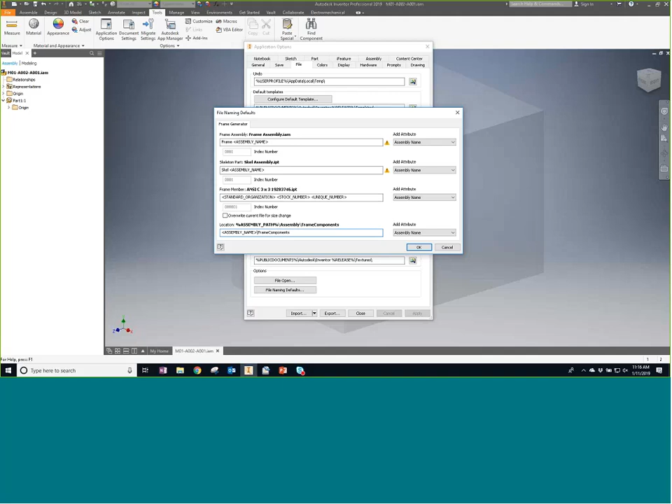Fair enough. So now that I've done all of that and put that in place, I'm going to throw some frame on real quick just so we can see this. The idea is that we're able to control all of that naming now.

And this isn't something that we have to—before, you're kind of at the mercy of the defaults that it's going to give it, and then maybe you'd go in and rename some things later or whatever else. But the idea would, you know, it was definitely a secondary operation.

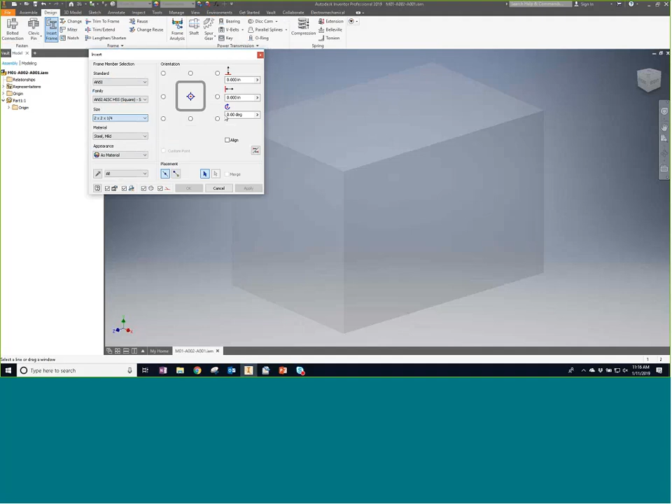So now we can continue. I can just continue on here, and I'll just do a real quick frame up here. Just grab some stuff—you, and you. That's good for now. We'll just say that because I want to show something else in a moment. But I'll say, okay, that's all good.

And I'm going to apply that, and it comes up with my names. So as it comes up with the names, you notice it's called frame, and then whatever my assembly name is, which that's my assembly name, M01, A002, A001, that's my assembly name.

So it says, okay, naming the frame that, naming the skeleton that, sounds good to me. And then it knows my frame name, it knows my location, which is now frame components, because that's where I told it to go, knows my skeleton name, I'll say, yep, that all sounds good to me.

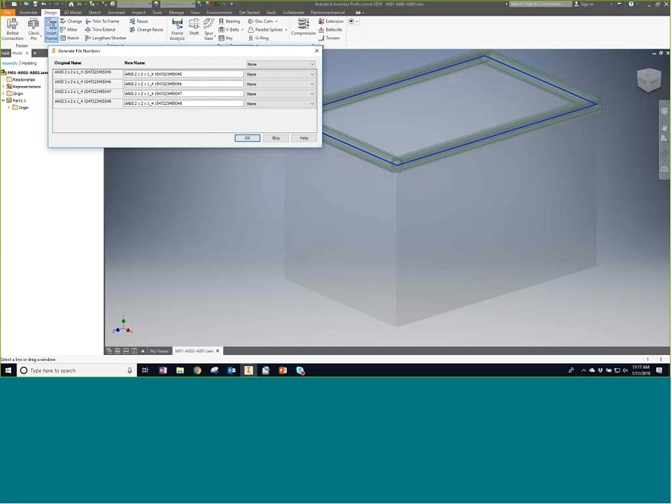And then each of these are being named. You'll notice they'll have a unique number as it goes through. So it's looking at it, it's hashing it, pulling a unique number for each one, and it's calling the information out. I say, okay, sounds good, sounds good, sounds good.

So now I've got the unique numbers, the unique names, all of that placed in there. It's a great way of accessing this to make sure that these don't overwrite each other, to make sure that we're not fighting for different names within there. So I think it's a great addition—a simple one, but a really cool way that they've added to that.

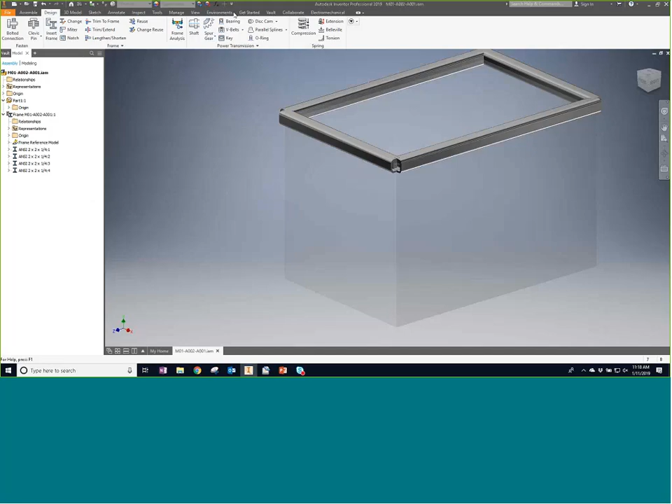I'm going to just jump back. A couple other quick things with Frame Generator, which is probably one of the bigger areas, better tools that we have within here. One thing they did is they added multiple select for a couple of different things. It works with miter, it works with notch, where we can now multiple select items.

I think we're going to see this—and this is my total made-up prediction—but my guess is we're going to see this multiple select happen more and more with Frame Generator. It was very much a frustration for me when I would go to work with something and I had to select it piece by piece. Oh yeah, that one's going to go here, great, that one's going to go here, and we'd kind of have to work through that a little bit.

Now we have the ability to multiple select these different items, and I've got just a moment to show some of that. I'll jump back here to monitor one. So with this, I'll just take a look at the top view, and I've got all my corners on here.

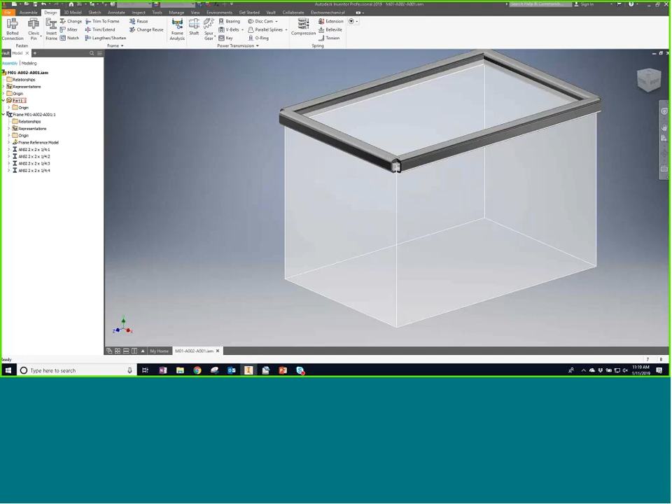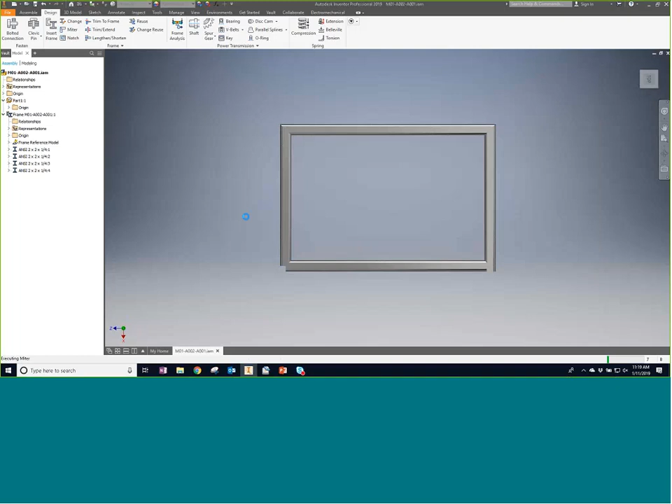I'm going to say miter. I can select multiple frame members, or I can select just one pair. With multiple, I can even window select, so I'll go through and grab all of that and say okay, sounds great, and now it'll just miter the whole thing at once. It's a simple enhancement, but a welcome one. It makes life a lot smoother when we're not having to pick and pick and pick and pick.

If I take a look at the notch, it's exactly the same thing. You see the select multiple frame members to notch cut, where I could notch that out of there. I don't think I've got anything set up right now for that, but we can go through and say yep, this is how this is going to work, and I can select which ones we're going to notch, which ones we're going to apply the profile to, and I can select multiple members. So I like that they're adding those selection tools right into these other tools that we have.

And this is why we don't see the file format change. You notice all these tools that I'm using, it's naming, it's selection sets, things like that. It's not a complete rework of something, but it is a nice addition to what we've worked with before. I like how they've set that up.

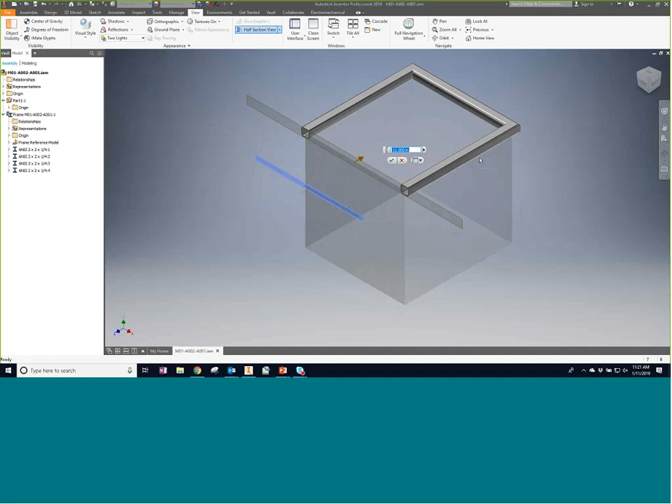There is a new option when we do a section view, when we're looking at something and we set up a section view. I'm just going to set one up here real quick. So I'll do a half section view, and I'll base it off of this, but drag it back. Okay, so we traditionally get this kind of section view look right there.

This kind of hatch pattern goes on there as it gives us that section. We actually can now adjust what that is. We can adjust the bitmap that goes there. We can go through and say, well, do I want to see that gray kind of view that we've always seen, or do I want to adjust that to something else? And we can. That's kind of a nice benefit that they put in place. Nothing huge, but we can now make an adjustment to that.

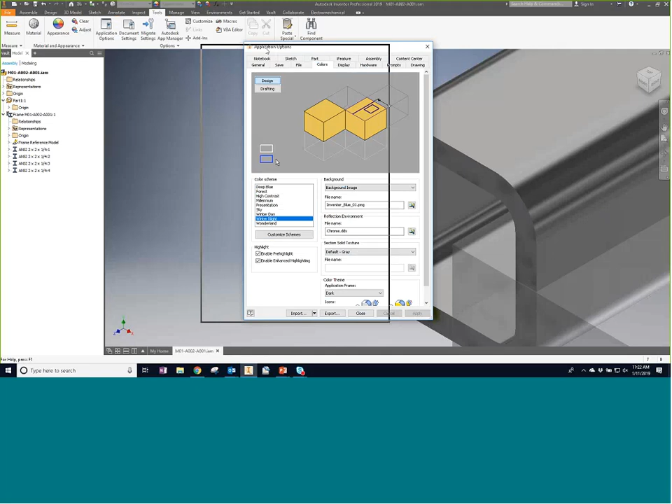If I go to Tools, just where I did before, Application Options, and here on the colors, here I now have my section solid texture. So that's what we're looking at here. And there's the default gray, or I could go select a bitmap that I wanted to apply to that.

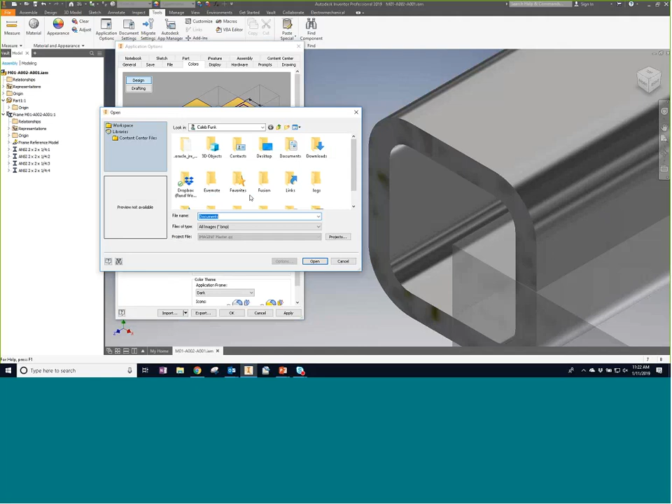This is particularly nice if we're trying to give some sort of presentation where we want to show, and I don't want just this simple gray look within here. Maybe I want some specific bitmap so that we can see what a section cut of that would actually look like. We can now go select whatever bitmap and apply it to it. It does have to be a BMP, can't be a PNG or a JPEG, so it's going to be a bitmap that will apply to it.

One reason that I wanted to point that out is Mark Flayler of IMAGINiT. That was one of his suggestions, and it's always fun to see your suggestion make it into the actual release of the software. So thank you, Mark, for making that suggestion. It's always a good one.

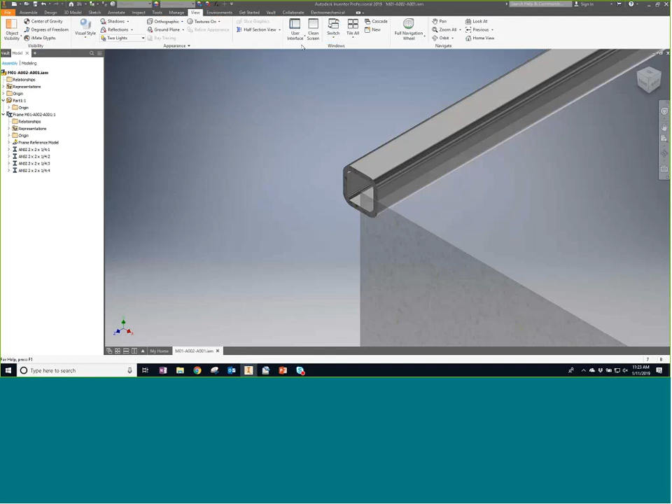I'm going to stop sharing here for a minute. Oh, my apologies, I did want to keep sharing. I wanted to get rid of my section, that's what I wanted to do. So I'll just go back here to my view and clear out my section. It's a simple switch, you can go in there and make that adjustment so that it's one or the other. That's just kind of nice. I'll end my section view so I see that.

I'm going to turn this part off. I'm going to create a super quick drawing of this. It doesn't really matter to me much what it is.

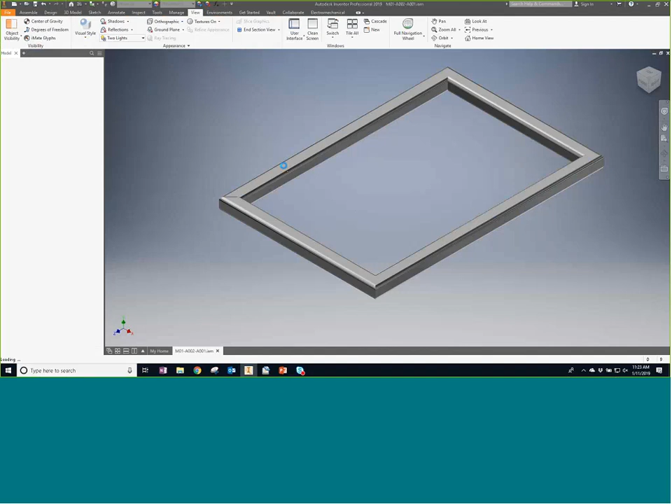Drop that down so it's the right size. There we go. Okay, all right. And then I'm going to place some notes on here.

I was going to just write this as some text, and you might notice that I intentionally spelled that wrong, and it gives me the little underline. So this is spell checked within here so that I can go through - I think I went 'sime', I meant 'some'. But there is a spell check tool now built right within here. It's part and parcel of it. Now we can see, I could ignore it, add it to the dictionary, exactly what we would think before.

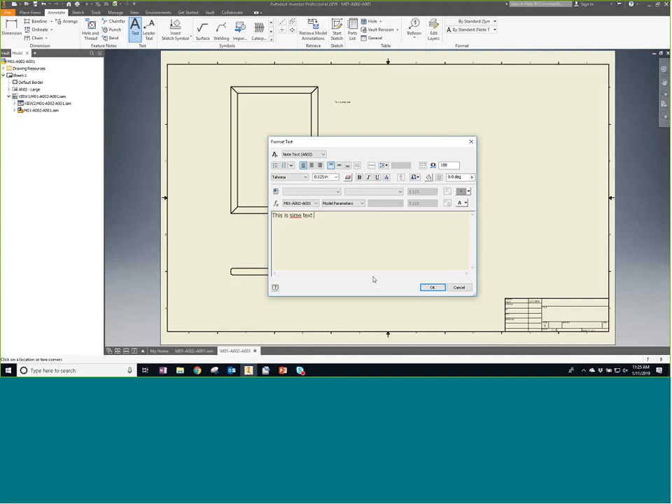This was actually available - there was like a custom secret hidden area within Inventor. You could kind of go turn this on. This works very, very much more like AutoCAD would, though. It's much more straightforward, and it's just there. So if you install 2019.3, you will have this spell check available within there. So again, it's nothing huge. You kind of could get to it before, but it's just part and parcel of it now. So I like that.

A couple of things that I'll point out about Vault, and this is 2019.1 of Vault. So Vault only had one of these enhancement packs that have been released, whereas there were 3 with Inventor. But it's really kind of a neat idea, and that's the idea of opening a drawing from Vault.

So traditionally, if I was working on a particular part from Vault and I wanted to go open the drawing, I would have to go search for it within Vault. I just have to go dig it out. Even though you're connected to Vault, and even though it knows it's there and understands the relationships and how everything fits together, you would still have to specifically go connect to it.

So what we have now is if we can just right-click in the browser and say, open the drawing from Vault. And if there's a drawing associated to it, it goes to Vault, finds the drawing, opens it up. If there are multiple drawings, which is possible - I can have that file linked to as many drawings as I want to - a dialog box appears with Vault so that you can select which one you're going to open. So you can say, oh yeah, I want to open version 4 of that or whatever it would be.

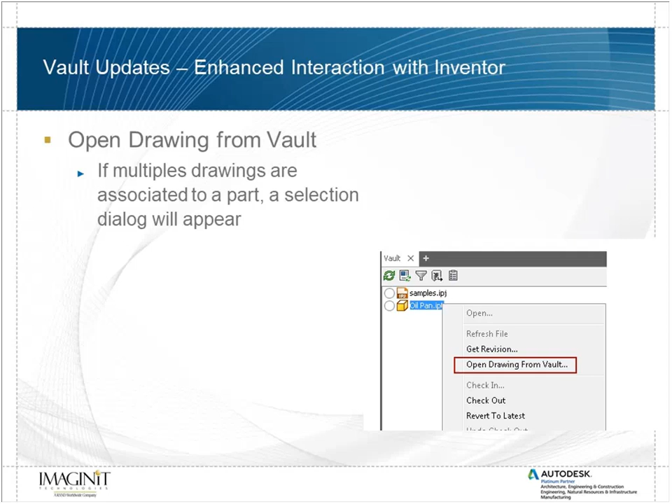So it doesn't change what Vault does natively, it just enhances what we have, and it's a way to do that. And the other one is kind of along those lines, and that's replace from Vault.

If I replace from Vault, I can replace a single instance, or I can replace all instances, just like I would normally with Inventor. Inventor's had a replace and a replace all command for quite some time, but those were based off of files that were on your hard drive. These are files that do the same thing, but it's all files that come from Vault. So it's a way to select to replace right from there.

It does work only from the Inventor browser. So if you get this installed and want to try it, just be aware: the Vault browser, if I have 10 items, it just shows one of them in the Vault browser because it's one file that's linked in. That's all it cares about - it doesn't care how many instances there are. So you will see this only in the Inventor browser, meaning you have to be in the Inventor browser to use the replace all.

And it's just a right click - it's one of the Vault options that we have off the right click. Again, to me, it's another reason to use that right click. It's just one more tool that's under there. But it's nice to see this direction, them going in this direction. This is kind of day-to-day use in my mind - just things that we want to use all the time.

And you run into that, wait, gosh, why can't I open the drawing? Yeah, I got to go download the part and then use the Inventor replace. Well, now we don't have to - we can do it right through there, as part of that.

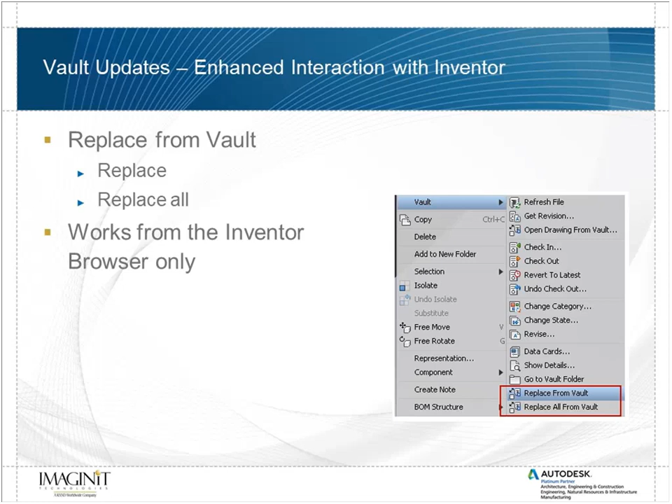Another thing with Vault that's kind of interesting - it affects, there's billions, and I'm probably not exaggerating when I say billions of PDF files in the world, and probably millions of AutoCAD files, and a lot of times they end up being connected to each other. AutoCAD has been able to make use of a PDF underlay for quite a while now.

So what we have is before this release, before 2019.1, PDF files had to be checked in and out separately from the AutoCAD file. It didn't really see it as a connected file.

Now it's a little different. It's treated the same way as an XREF in AutoCAD is. So the PDF is seen as a connected file. It'll attach it to Vault - it knows it's part of it, knows it's there. And they can be attached directly from Vault. So just like I can attach an XREF from Vault, I can attach a PDF from Vault as well.

So it's just kind of enhancing the workflow. A lot of people are already using this where they've got those items connected, and instead of having to do it all manually within Vault, PDFs are now treated just like any XREF would be. So it's just kind of a nice addition to that.

So as I was going through here, there's so many times if you're a user that's been using AutoCAD, Inventor, or Vault for a long time, it's really easy to continue to use the tool the way you always have. Well, we always built it like this. I've run into this with a few different people we start talking to, and they're like, yeah, we never really used that, we always did this thing. I'm like, wow, this tool came out 3 years ago and it would really enhance what you're doing there. That's why I think sessions like this are so important, just to make you aware of what else is out there. But I know a lot of times, whether it's implemented or not, or spending the time to look at it, there's a lot going on.